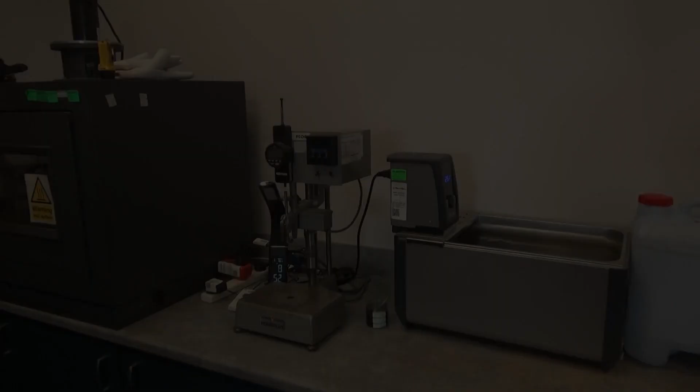First, let's start with the old M1 spec. For a few decades now, the names for the grades of the binder were based on their hardness values from the penetration test, such as 40, 50, 60, 70, etc. In the penetration test, you take a tin of bitumen that's been cooled to 25 degrees and you let this needle with a set weight on it fall into the bitumen for 5 seconds. The results it gives are in tenths of a millimetre.

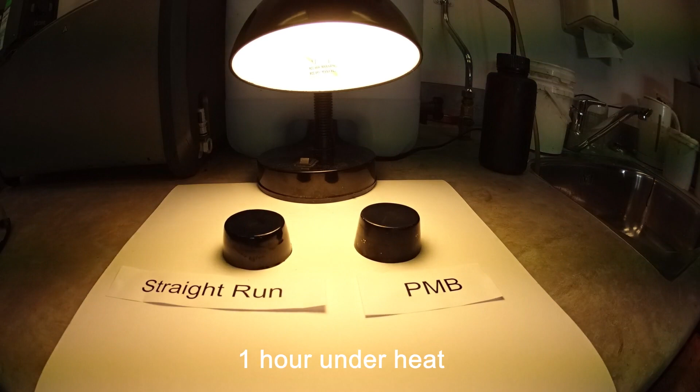Binders behave very differently at different temperatures. Take these two for example. At 25 degrees they both feel pretty similar, but apply a bit of heat and we have a whole different story. You can now clearly see one of the benefits of using a modified binder in high temperature areas. It's clearly not apples with apples anymore.

So what sort of temperatures are we talking about here? As you can imagine, the actual maximum temperature on the pavement can get a lot hotter than the air temperature due to heat being absorbed into the dark surface. So for a cool climate, this is less than 52 degrees, a moderate between 52 and 58 degrees, and for warm, 58 to a massive 64 degrees. Now you can start to see why testing at 25 degrees was never going to help us out too much.

You will note that the M1-A spec doesn't actually have any test specifications itself. That's because it's been prepared as a supplement to an existing American standard called AASHTO M332. It's this document that has all the allowable test limits. So what are our binders called? Based on the AASHTO M332, these are our binders.

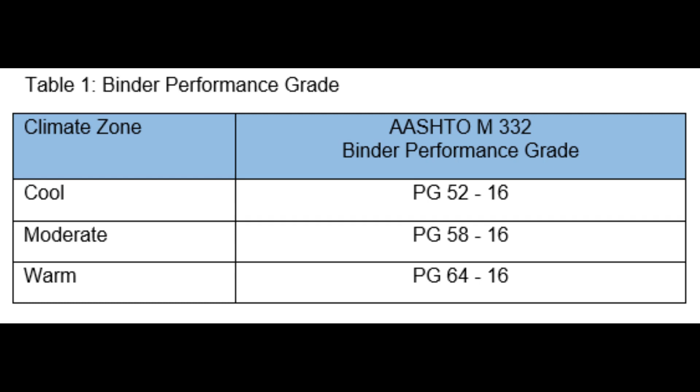So let's dissect that. PG stands for performance grade. The 52, 58 and 64 are the maximum average pavement temperatures, and the 16 relates to the minimum average pavement temperature of minus 16 degrees. So to use the AASHTO M332 spec, you first find your climate zone from the map for the area you're paving, then you get the binder grade from the table. It's this grade you use to help you get the specs.

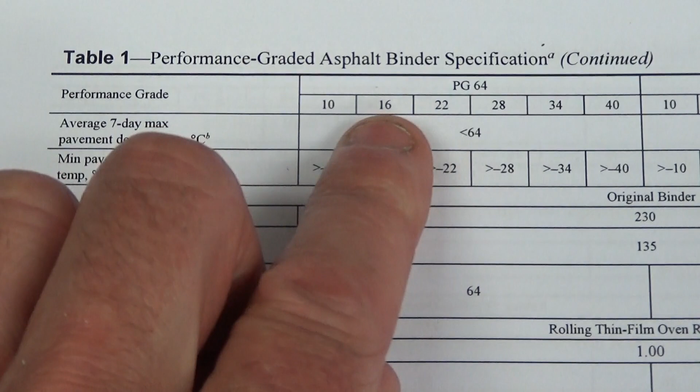So take a PG64-16 as an example. You select the section with the PG64 and then the column with the 16, then you move down that column to get your specs. Certain tests have different specs depending on the traffic category, which I'll talk about shortly. These are broken down in the left part of the table.

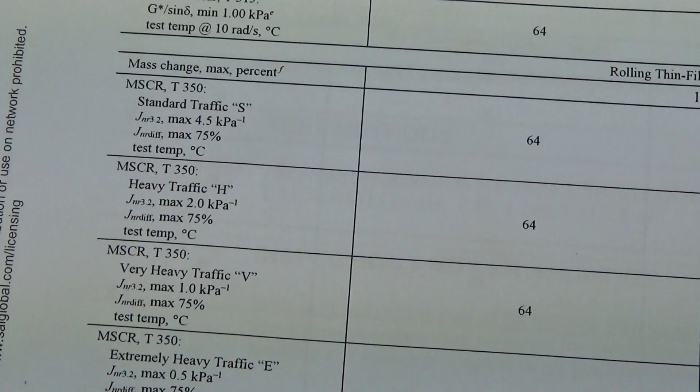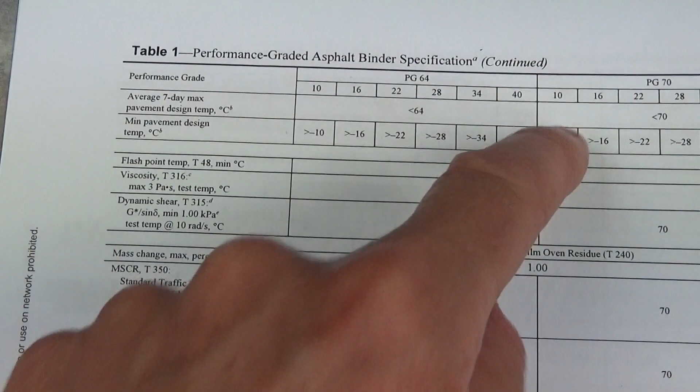It can be a bit hard to get your head around reading this table, as the specs themselves are either written in the left column for some of the tests or the centre part for others. A lot of these central numbers are actually temperature conditions required for the test and not the specs themselves.

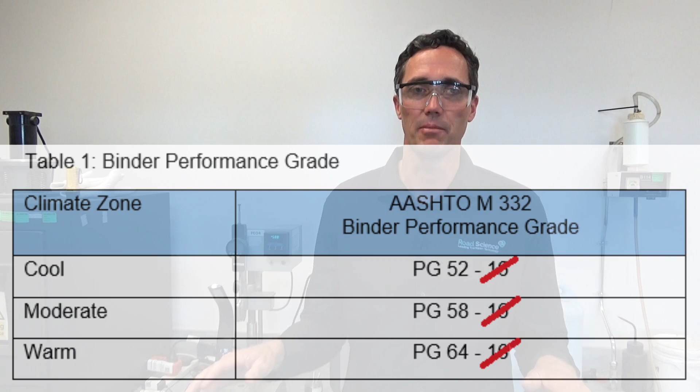NZTA has made it easier for us and standardised the minimum temperature as always greater than minus 16 for all regions. So you're always going to follow down one of the columns with the 16 in it. As this minimum temperature is always greater than minus 16, let's not bother referring to that in the name anymore. So we have PG52, PG58 and PG64.

Sweet. So we've covered off the effects of heat on a binder's ability to withstand deformation and how we name it. The next biggest thing that will kill a pavement is the traffic. How many and how fast are they going? The old M1 had no reference to traffic volumes or speed at all. It wasn't until you got to other specs like the M10 asphalt spec that there was any reference to traffic. Even then, that was only a guide. There was still a large risk of binders being specified for a contract that had no chance of surviving the amount of traffic they're being subjected to.

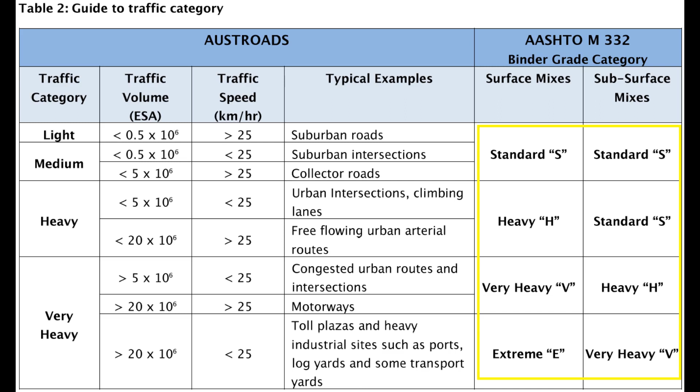There are 4 binder grade categories based on the type of traffic, and these are standard, heavy, very heavy and extreme. M1-A gets you to combine traffic volume, speed and where the mix is placed to come up with one of these categories. This category is also used to determine some of the specs in the AASHTO M332 table as shown before. The team who put together the spec have included a super handy flowchart to pick the binder grade category rather than having to use the table.

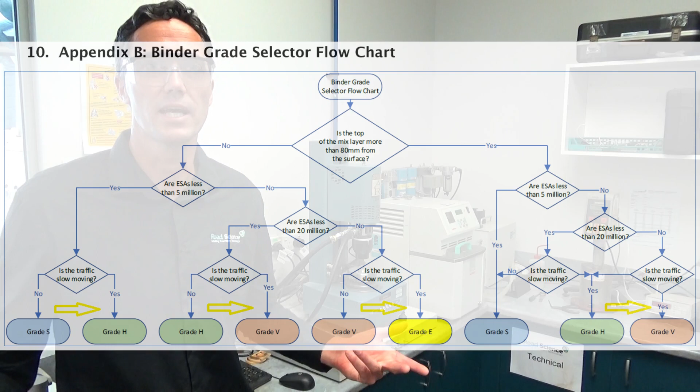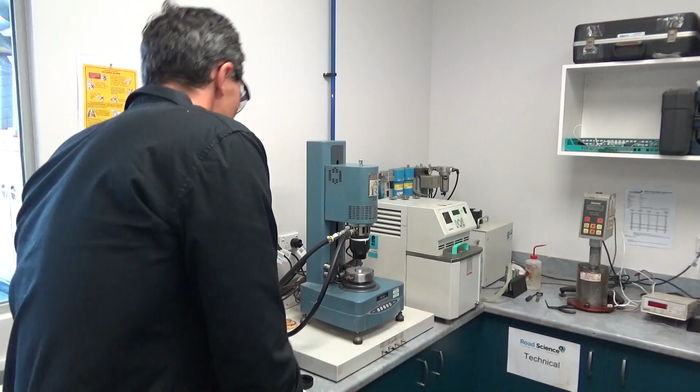What you will notice is that when traffic is moving slower, the binder category bumps up to the next hardest level. Why is that? How does speed affect how a binder behaves? So bitumen is viscoelastic, which means as a material it behaves both elastically and viscously to different degrees at different temperatures when a force acts upon it. When something is fully elastic, when an applied force is removed, it will return back to where it started. When it is viscous, the material changes shape for good. Bitumen is somewhere in between both of these. Where exactly depends on temperature and speed.

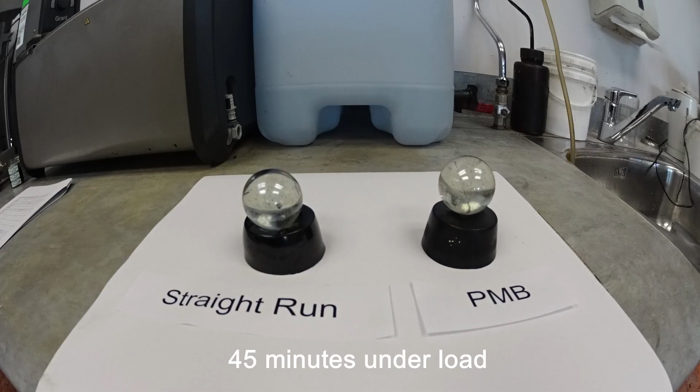We've already seen how heat shifts bitumen from one end of the spectrum to the other. Loading on a pavement from standing or slow moving vehicles has the same effect as heat. That's why it's so important and why it's part of the decision making process. When it is slow loaded, it behaves more as a viscous material, like when it's hot, and can potentially rut or shove. Here's the same two binders from before, where at 25 degrees they both felt pretty similar. The straight run binder doesn't stand much chance, but again, as with the heat example, the modified binder's performance is miles ahead.

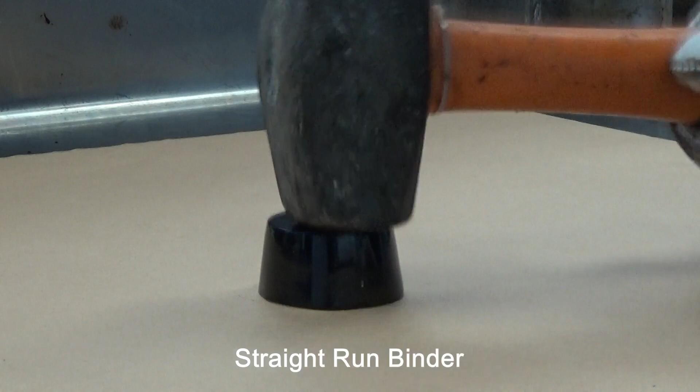But let's also look at the effect when bitumen is fast loaded. Come check this out. When the same binder is fast loaded, it acts a lot more elastically, much like when it's cooler, and can stand up to a lot more load. So now the spec has you covered for the two main factors that can contribute to the failure of a pavement: temperature and traffic. It will take a bit of time to adjust from the old penetration grade names to the new performance grade names, as it's a very different structure to get used to.